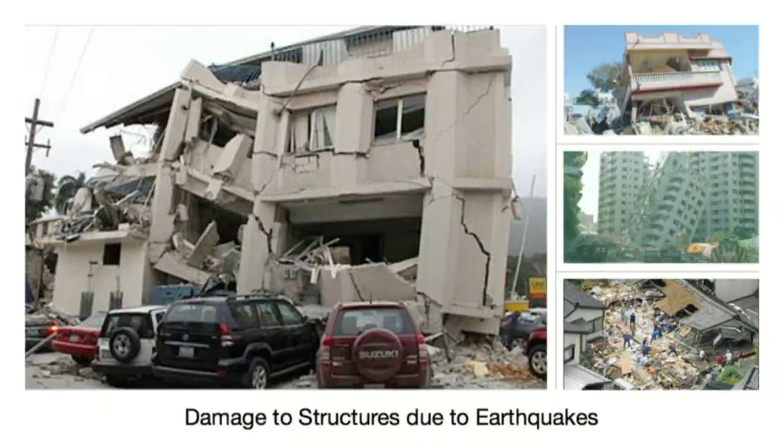So engineers are trying to find a good design for a structure that would withstand earthquakes. And till this day, engineers fail to do so.

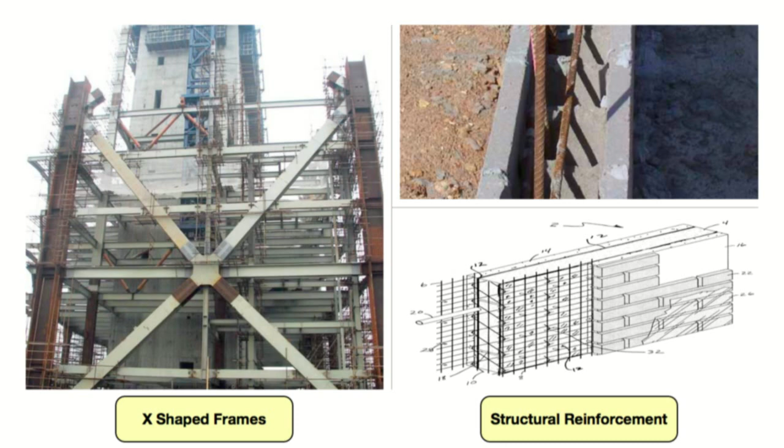There are some solutions or efforts in this, like the ones you see on the screen: structural reinforcements using extra cement or steel, thicker walls, or using X-shaped frames to support the structure. But with all of these attempted solutions, there is no adequate design for an earthquake-resistant structure.

So this is a big problem in civil engineering. And as I said, till this day, 2010, there is no solution for this. So let me just summarize the problems with the suggested solutions.

The first is increased self-loading on the structure. People try to make the structure stronger by using thicker walls, more cement, more steel. Now this creates another problem: the weight of the structure becomes so high that it loads itself. This is called self-loading. The heavier the structure, it puts stress on itself before any kind of external force, like the one produced from earthquakes, strikes the building. The structure can put so much stress on itself.

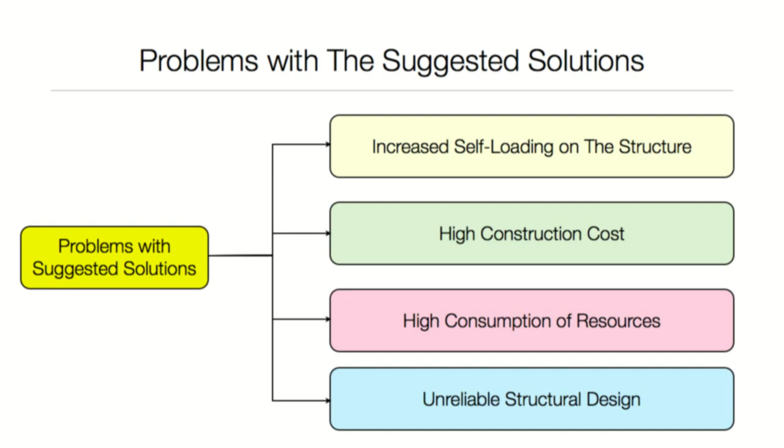The other kind of problem is high construction cost, because you are using supports and structural reinforcements, so the cost of construction increases. Not everybody has this kind of high cost to reinforce a structure that much. Also, high consumption of earth resources, that's a big problem as well. And at the end, the bottom line is unreliable structural design. With all the knowledge of people, they fail to find an adequate design that would withstand earthquakes.

So in the second part of this episode, we'll see how we can find the solution from the Quran by learning from the knowledge of Allah, God Almighty, in the Quran, to solve this problem in a matter of minutes. So let's go to the second part.

In this second part, let's see the Quranic solution for the problem of not finding an adequate design for an earthquake-resistant structure. If we go to the Quran and ponder upon the verses, we find the answer in one verse, only one verse in the Quran. By pondering upon it, we find the solution for this problem. So we'll see that the strength of the Quran is in pondering upon the verses, not just merely reciting it.

And the solution can be found in chapter 16 of the Quran, verse 68, which reads: 'And your Lord inspired the bees, saying, take your habitations in the mountains and in the trees, and in what they erect.'

So here Allah in the Quran draws our attention to the bees and their habitation, to the beehive. So we need to go and ponder upon the beehive, the habitation of bees.

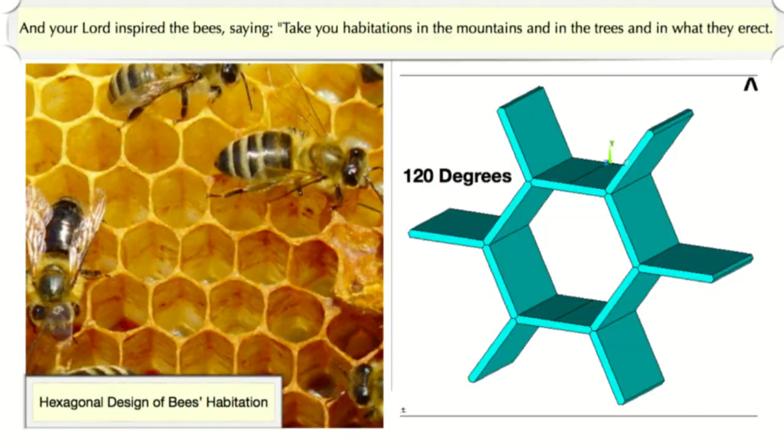So if we need to do some structural analysis on this unit to understand it more. As you can see on the screen, I just did some simple calculations here. The basic link in a hexagonal cell is the one you see on the screen, 3 walls having an angle of 120 degrees between them.

So in order to analyze the stability of this link, I assigned a point O, which is the link between the 3 members. This is the most critical point. And I calculated the summation of forces acting on this point. So if we take the x direction, the summation of forces will be: F minus F cosine 60 multiplied by 2. So the answer will be 0. So the summation of forces in the x direction is equal to 0 at point O.

And that starts to give you an indication why the structure is so stable. The summation of the forces is equal to 0, so there's no excessive displacement in the structure. Also, when you take the summation of forces in the y direction, you see it's equal to 0 as well. So this gives you again some understanding about why it is so stable.

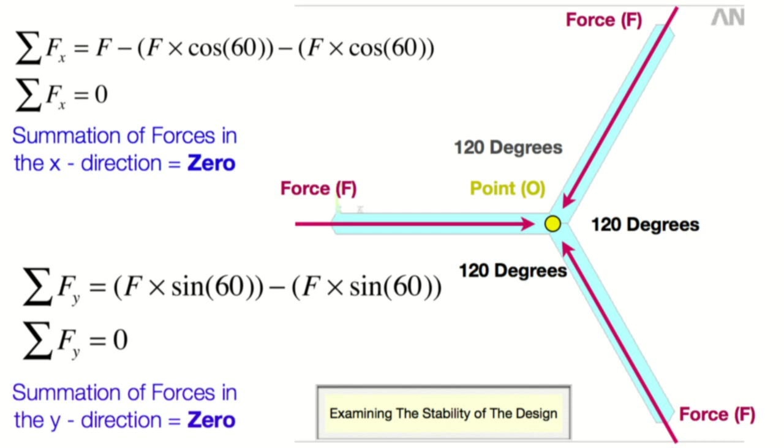To appreciate this more, let's compare this to the link we make today in our homes. In our homes, we make a 90-degree angle between the walls. Like the room you are sitting in now, look at the walls, you find them 90 degrees, not 120 like the beehives. If we do the same analysis on this link at point O, you see the difference: the summation of force in the x is not equal to 0, it's equal to force F. So if you have a large force, like the one produced from earthquakes, that will make a large displacement, a large bending in the structural elements, and that would make a big problem with the structure.

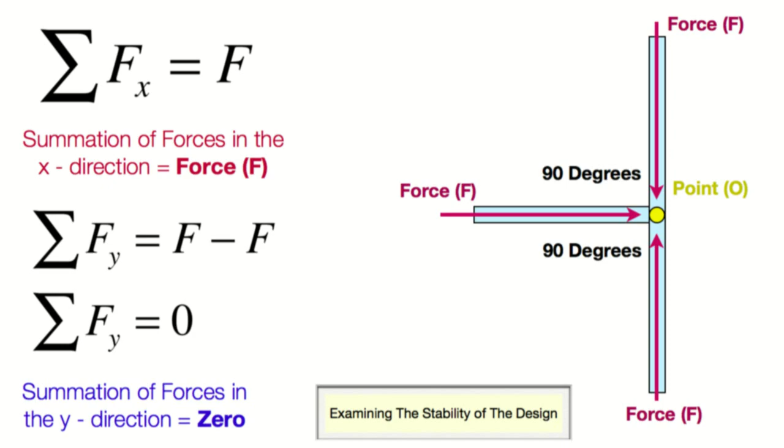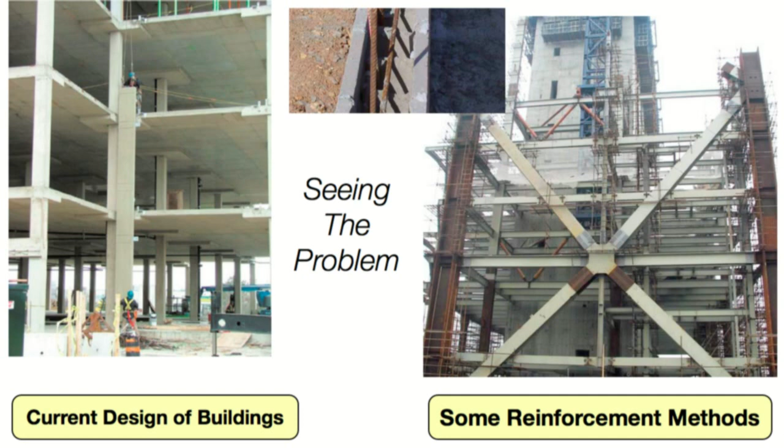And that gives you some indication why so many of our structures crumble when there's an earthquake. So we're starting now to see the problem. As you can see on the screen, the current design of buildings has this 90-degree angle between the walls, which is not good.

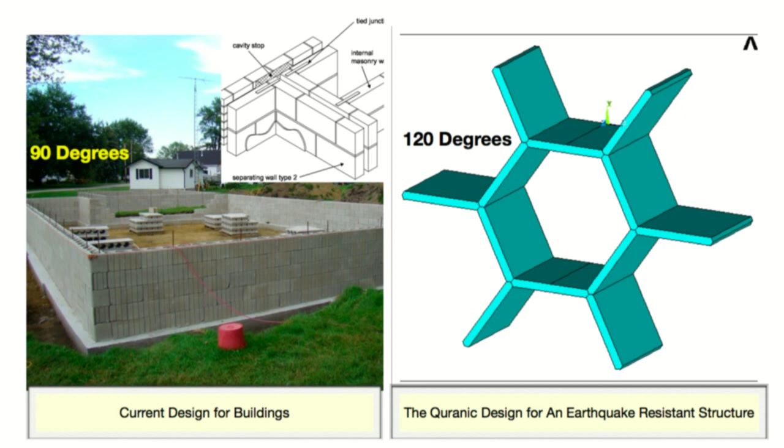But comparing that to the Quranic design for an earthquake resistant structure, the one you see on the right, we need to make the angle 120 degrees. This is just one aspect of the differences between how Allah created the beehive and how we, depending on our intelligence, make our structures. I just want to see the effect of this angle change, from 90 to 120 degrees, and what impact it will have on the structural integrity of the building.

So as you can see on the screen, this is the proposed design for an earthquake resistant structure from the guidance of the Quran. In the third part, we want to see how to implement this in practice, and you will see the superiority of this design compared to what people build today. So let's go to the third part.

Now we'll go to the third part: how to apply this Quranic knowledge in practice. The obvious way to do this is to build this hexagonal building and test it in practice. In order to do this, I first made computer modeling and simulation, using finite element analysis, which is a very dependable and very accurate method of computer simulation. So I built the model in the computer, applied the forces, tested it, and compared it to the way we build structures today. Let's see what I did with the help of Allah, God Almighty.

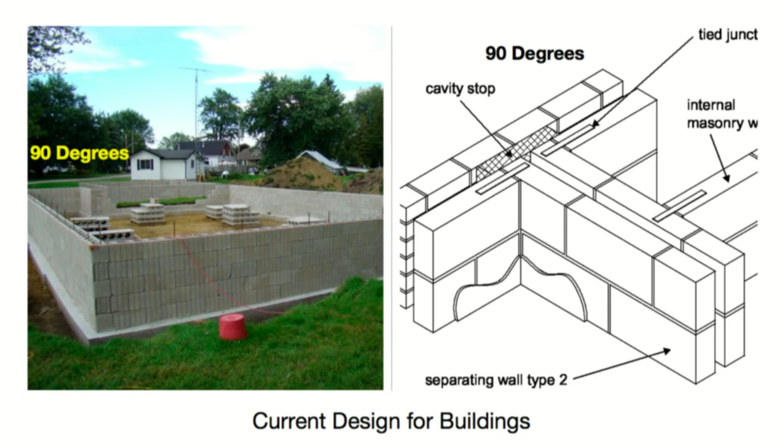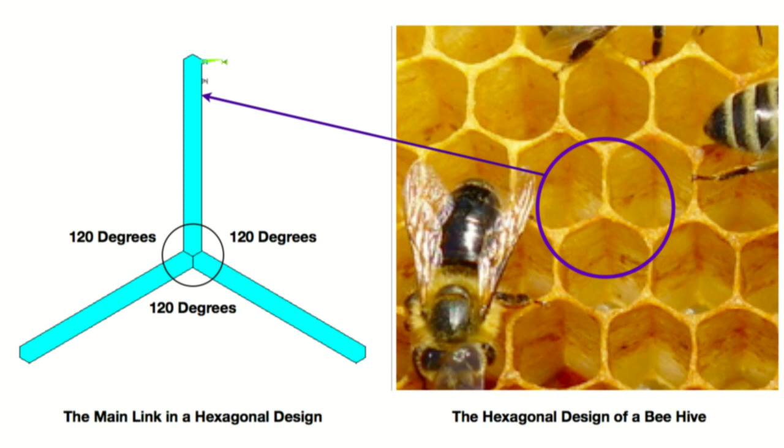So I started with looking at the current design for buildings and this 90-degree angle between the walls, and comparing that to the 120 degrees angle that we find in the beehive, which is really the secret, one of the secrets why the hexagonal design is so strong and lightweight at the same time.

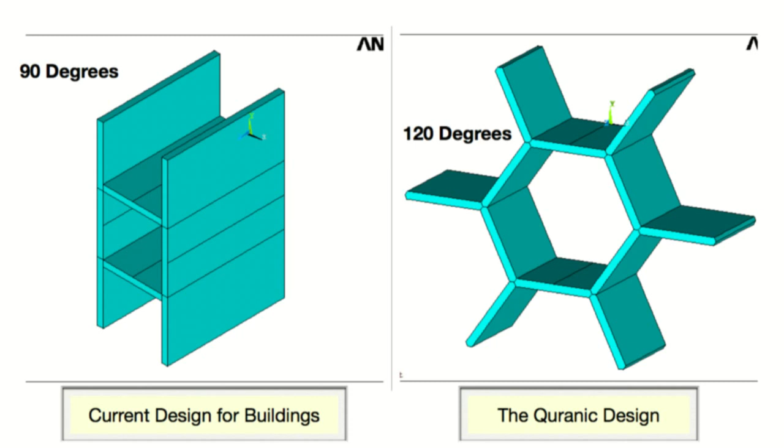In the computer I made two models, the ones you see on the screen. The one on the right is the Quranic design for an earthquake resistant structure having angles of 120 degrees, and the one on the left is the way we build our buildings today, having 90 degree angles between the walls. As you can see, the basic link in the hexagonal cell is the one on the right, and the basic link in the square arrangement of current building design is the one on the left.

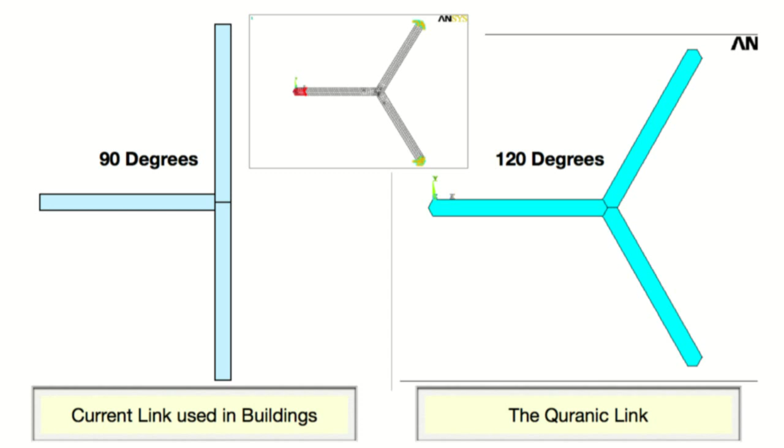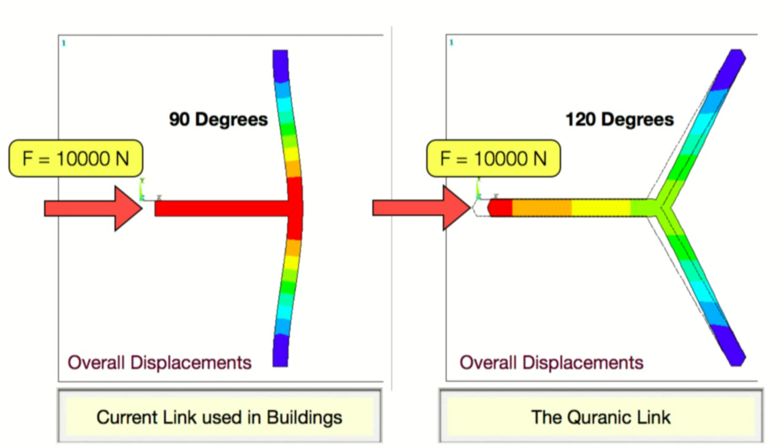In order to test them, I applied a compressive force of a magnitude of 10,000 Newton, which is a large force, on both designs, having the same material properties, just the angle is different. The computer can calculate the overall displacements in the structure, how much it will move based on this force, like the one produced from earthquakes, lateral forces.

This is the first set of results from the computer. As you can see on the right is the displacement value in the Quranic design, based on the 120 degrees, the hexagonal cells. And on the left is the one produced from the 90 degrees, how we build our structures today. You can see a huge decrease in the overall displacement values in the Quranic design, meaning a very strong and stable structure - a 91% decrease in overall displacement.

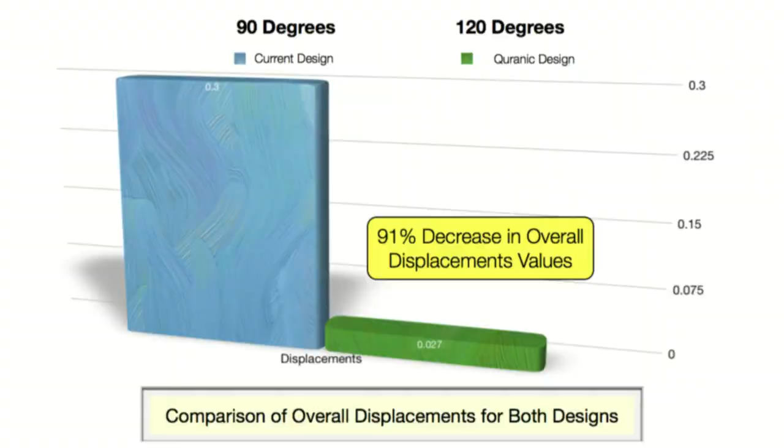So in the Quranic design, when you have this hexagonal link and apply a lateral force like the one produced from earthquakes, the hexagonal cell remains so stable, and the proof is the very low displacement values. This means it will not shake that much, which will reduce the stresses within the structure and make it more stable and more earthquake resistant compared to how we build our buildings with a 90-degree angle.

Another set of results is I looked at the stress within the structure, and the stress is very important. The stress is like the concentration of the force, the force over the area. So the higher the stress in the structure, the more probable it will fracture if it exceeds a certain stress within the structure, like a sigma ultimate or the ultimate stress.

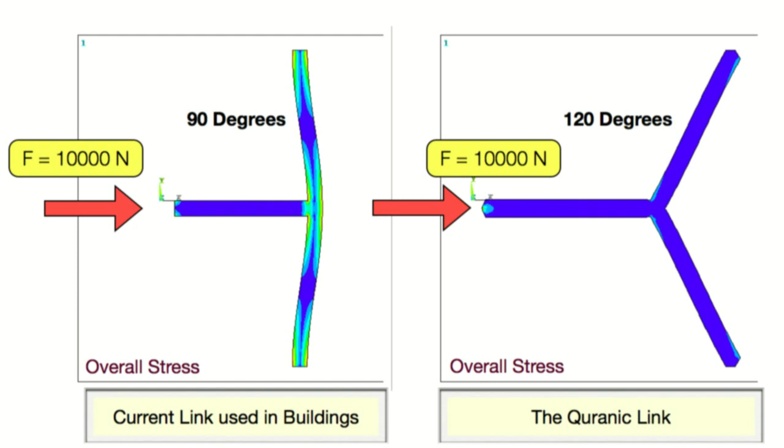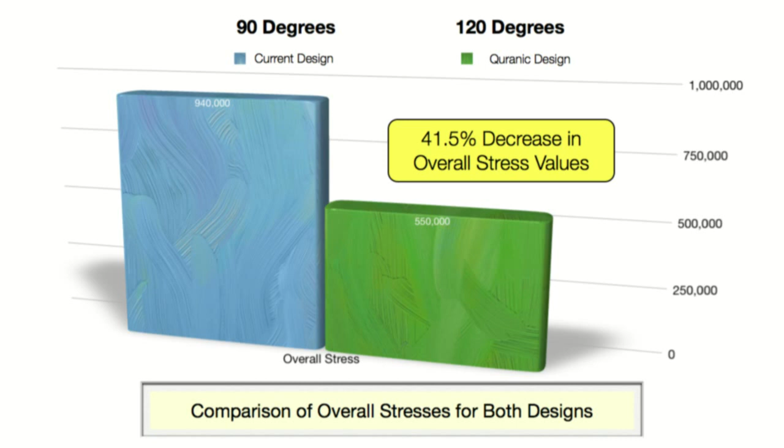So again, repeating the same kind of exercise, but here I asked the computer for the stresses. As you can see on the screen, the Quranic design shown on the right has a decrease of 41.5% in overall stress values. This means that the Quranic design under the same loading conditions has lower stresses within it, and that's something very favorable and really something excellent in structural design. You need a design with lower stresses such that it will not exceed its ultimate stress.

So you can see the superiority of the knowledge of the Quran in all aspects here.

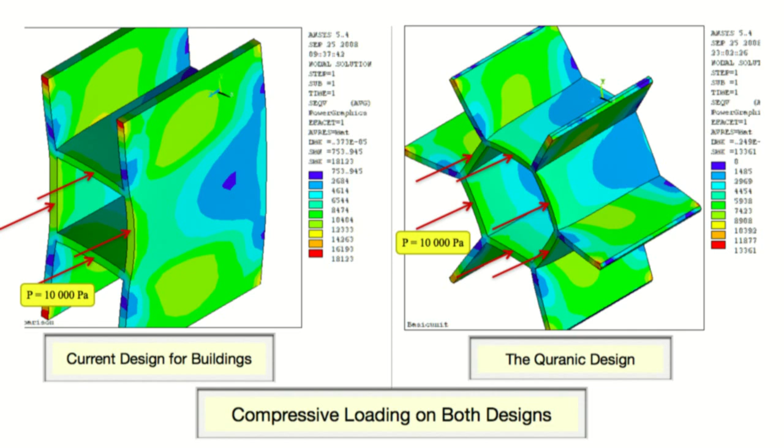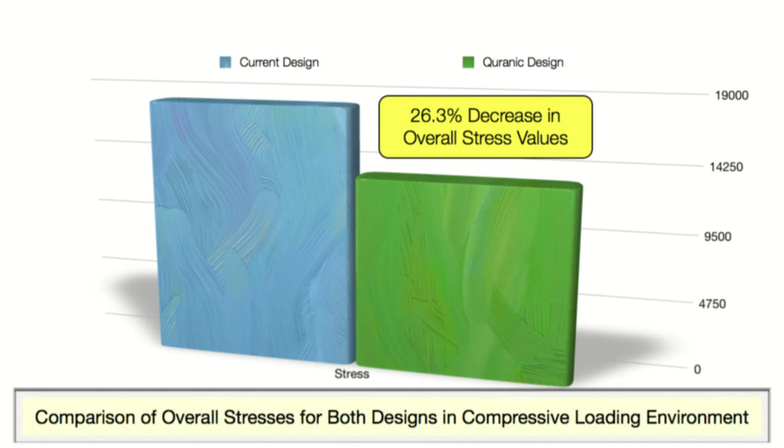The last exercise is that I built the complete unit shown on the right, and the complete unit of how we build our buildings today on the left, and applied a compressive loading to both of 10,000 pascals, which is a large pressure. Again, the computer gave me a 26.3% decrease in overall stress values in the Quranic design. This shows that the design you see on the screen is far superior in all aspects to how we build our structures today, and that's the solution from the Quran for the problem of having adequate design for an earthquake-resistant structure.

So, brothers and sisters, I showed today, with the help of Allah, the superiority of knowledge of Allah in a certain field in civil engineering.

The next step here is, after this computer modeling and simulation, to build the structure physically and to test it. So we can make a model home based on this hexagonal design and test it. That's the next step, Allah God willing.

So again, each episode you will see a problem in a certain branch of knowledge of people, and how the knowledge of Allah and the Quran solved this in a matter of minutes.